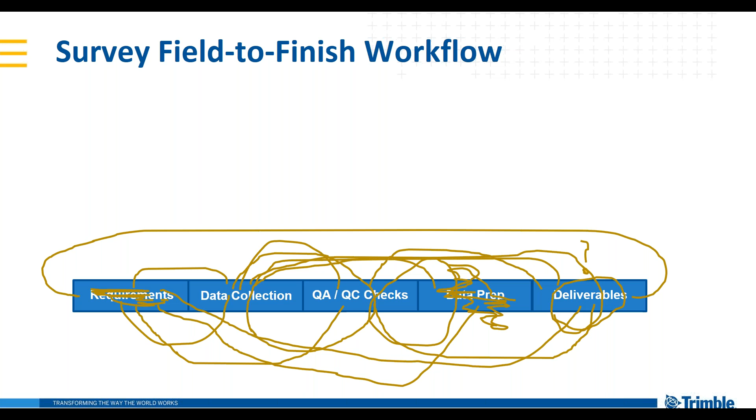So what I often found out was that the process kind of looks like this. Field work is messy, right? It doesn't always follow a nice linear path, despite your best intentions, and the ability to adapt and deliver is the key to success. And so this is the real world situation and the customer that we target TBC for. So this field to finish workflow is built and can be built on TBC with confidence.

Here's our little mission statement. I said little, it's anything but little, it's short and succinct, very clear as to where we are right now and where TBC is going in the future. So we want to be your complete survey office software enabling field to finish workflows with confidence.

And how do we do that? Well, we've done that by aggressively growing the software over the last several release cycles. If you're a longtime TBCer, then you've probably noticed over the past couple of release cycles that TBC looks entirely different.

Adam, in the 3 weeks you've been here, can you see we run lean, we run pretty strong, and we are trying to get as much value into the software as possible. Yeah, new stuff is continually going out the door, and it's a pretty quick pace.

So the story over the last 6 months, I'll say, since we had our big announcement of our new SX10 total station scanner, has been largely showcasing the SX10. And while Trimble has had tremendous success with that, and we've heard from our customers who've been very pleased with the SX10, that's a new product. And we want to focus on our core customers here as well. I'm speaking to you. You're not going to be left behind.

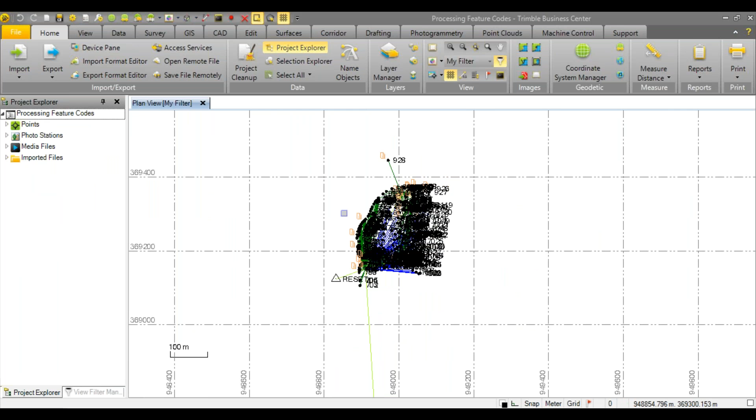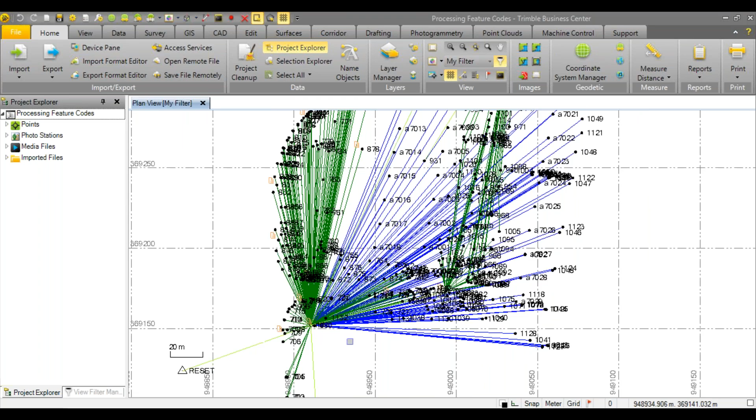So here's our project. You'll notice some points, images, image frames, and these vector lines or GNSS observations. This is raw data. A big message of TBC here is that you can see the raw data - you're not dealing with just coordinates alone off of a CSV, for example, where you have no idea where those coordinates came from, how they were collected, with what instrumentation, and then forget about trying to QC whether they were accurately collected to represent field conditions.

We'll refine this a bit in our project settings. I want to show you how to change the coordinate system. Right now we're in a default projection, so I'm going to go into change coordinate system and zone, to US State Plane all the way at the bottom here, and to Colorado North. This data was collected right outside of our offices here in Westminster, Colorado.

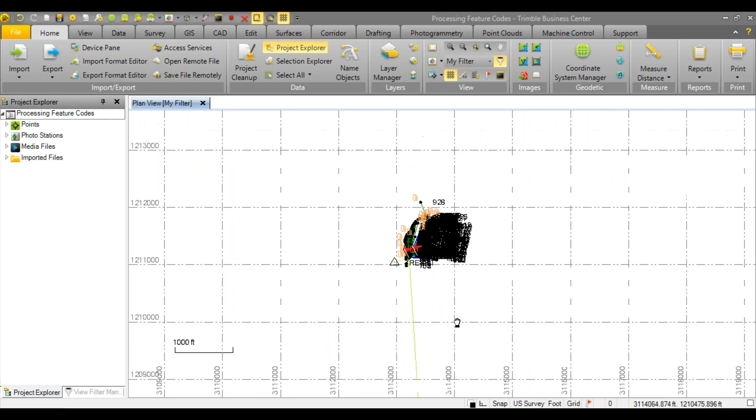In addition, you can switch and toggle back and forth between units. For example, this data set was collected in meters, but I want to see and work with these units in US survey foot, common to the United States, in the units distance of project settings. You can see in the background that the coordinates have changed automatically.

A couple more introductory things - your friends are Project Explorer and View Filter Manager. View Filter Manager, along with the layers, allows you to control what you view in TBC. The Project Explorer is sort of the story of your project. What's in here? We've got our points, photo stations, and media files. There was some imagery taken with this data with, I think, a VX spatial station. It also shows our imported files.

Along the lines of the QA/QC story, this shows exactly what was done and in what order in the field. So to step through what your field surveyor did, this RTD point was completed with a Helmert resection using these points, and collected all of this information. Very interesting, very powerful tools at your disposal - a unique feature to Trimble Business Center.

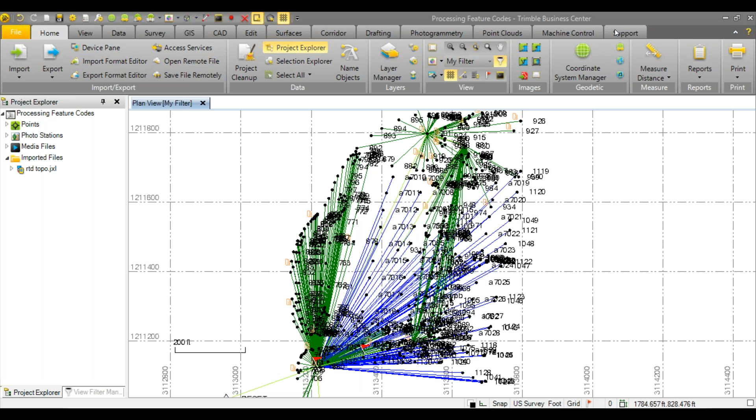Now, I mentioned the command pane earlier. Let's say I wanted to view this data in 3D, and I didn't know where that 3D view was on our ribbons. If I press the F12 key, the command pane launches. The improved command pane allows you to search for things - it's an automatic wildcard search where anything matching what you've typed, any command, will show up. So I'll type in 3D - I wanted to launch a 3D view, and all the commands that start with 3D show up here. I can launch the command right from the command pane, and I've got my 3D view.

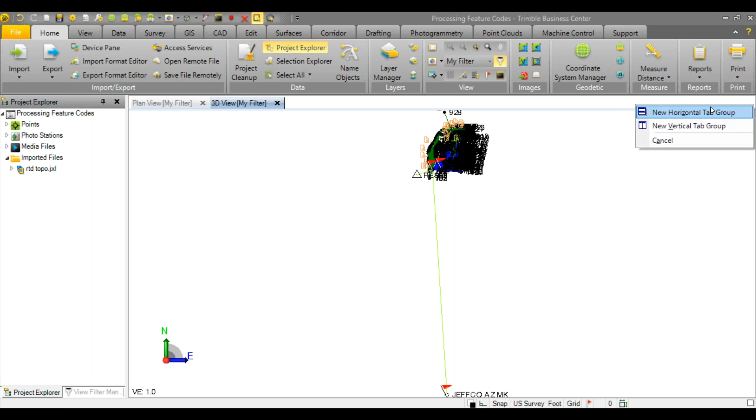Close this out, and I'll press and hold to drag the 3D view and dock it separately, so I can view this data set in plan view and in 3D view at the same time.

Now if you'll notice here as well, again on our QA/QC story, there are these red flags. What do those flags mean? There's red flags and yellow flags. Red flags are computational errors or tolerances exceeded, and yellow flags are just warnings. Now, while TBC won't tell you what to do with these, it will display that something's going on here.

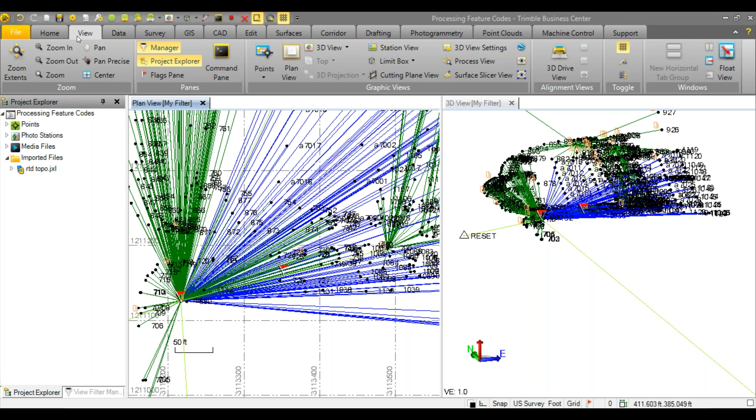Take a look. So in the View tab, if you open up the Flags pane, you'll see the source of these flags. I'm going to focus in on these two right here. If I pick the entry in the Flags pane, it is then selected in my views up top. So right here from this Jeffco AZMK to RTD to 700, there's a mean turned angle, MTA, with a residual that exceeds the horizontal tolerance set by the project.

Well, how do I deal with this? It's up to the user. We won't tell you how to deal with it. We'll just tell you we're reporting the raw data. One way for additional information is to right-click and say mean angle report. This will launch an HTML report showing the components of the mean angle, and there's our residual, 5 seconds.

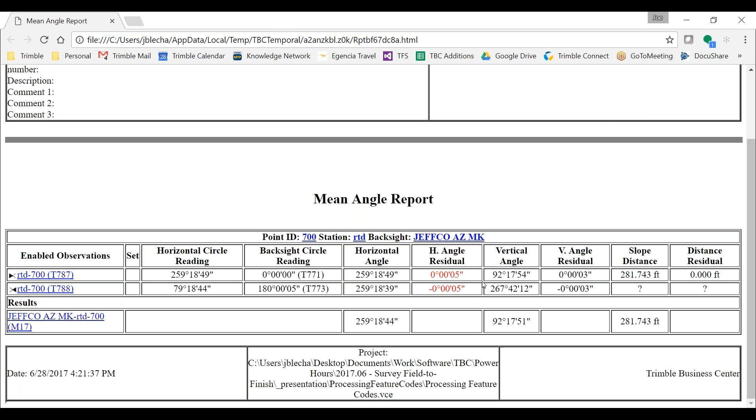Where this residual comes from is in our project settings, computation, mean angles. You can see the horizontal and vertical angle residual acceptance is 3 seconds. So that's where the tolerance comes from.

The next one I want to focus on is the Jeffco point itself. And it says this point is out of tolerance. It's pretty high. This is several inches, 22 hundredths horizontally and 62 hundredths vertically.

Again, I can right-click on this to launch a bunch of features. If I have this selected in the flags pane, it will also be selected in my points or also in my views. If I right-click, go to Point Derivation Report, I am then presented with an HTML report that is linked to my data, reporting on the coordinates, or the observations and the measurements that define this coordinate.

So this Jeffco point can only have one physical location in space, but there's 2 different observations, and this grid point here is probably keyed in the field, is used to define the grid northing, easting, elevation, and height. And here's the point that's throwing it out. Remember I said 22 hundredths and 62 hundredths vertically? And you can see it's enabled as a check. So the surveyor probably in the field went through and tried to check back into this Jeffco point from point RTD. Just use it as a check.

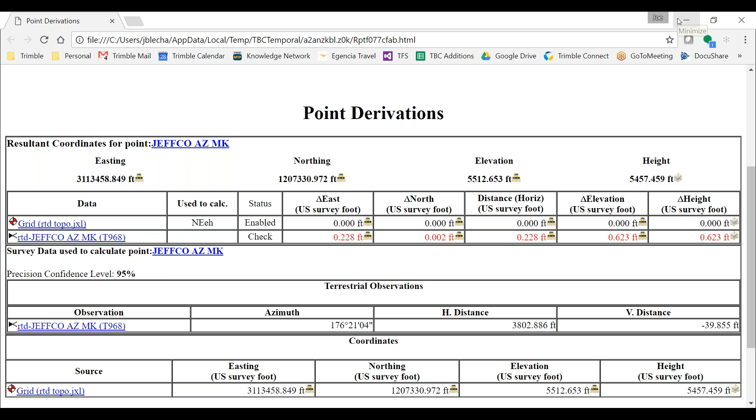And for whatever reason, maybe it's worth a phone call to your field surveyor, say, hey, what happened here? We can deal with this in TBC. Since it is only a check, I'm going to go ahead and disable that observation. And I can do that by expanding the point option in the Project Explorer, finding the observation, here it is, right-clicking, say Properties, and yep, here we go, confirmed as a check. I can turn that to disabled and recompute my project with the F4 key, and the flag goes away.

Now, Adam, that was pretty easy to make that red flag warning go away. Do you see some problem with what I just did? Yeah, I mean, your problem's still there technically. You disabled it. Like you said, you didn't get rid of the problem. You just almost ignored it at that point. It'd be good if you had another check that actually checked into it properly. Right, right. So very, very powerful tools here, and we are definitely not advocating hiding potential issues in the data, but at least you're made aware of it. And TBC, if you, as the manager or as the data processor, deems that this problem isn't a problem, you can adjust accordingly.

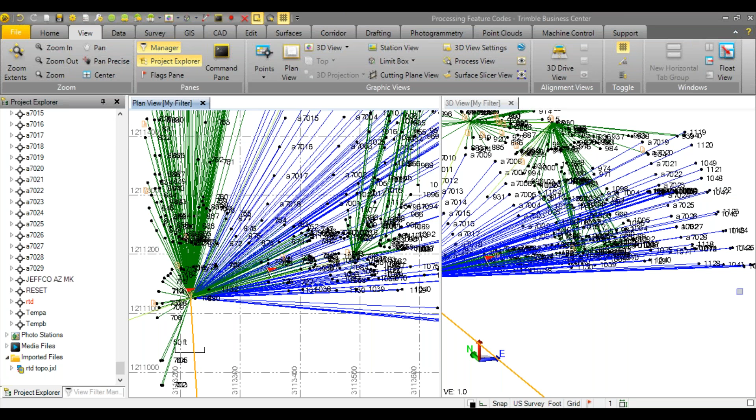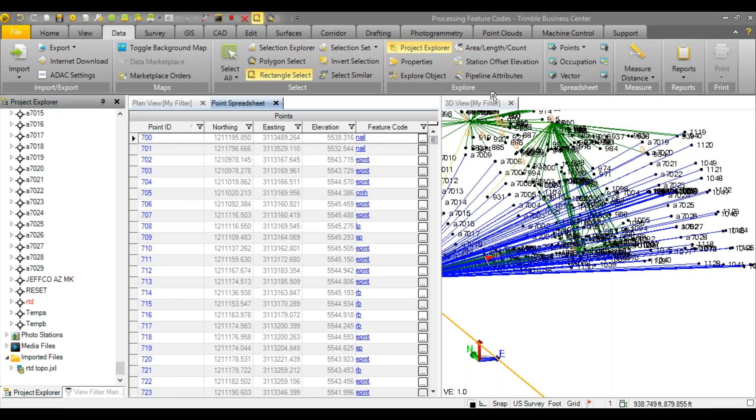Another useful tool is the spreadsheets in data. We've got a couple of different spreadsheets here: points, occupation for total station measurements, vectors for GNSS. I'm going to launch the point spreadsheet, and again, dynamically linked to our data. Any point that I pick in the spreadsheet will then be highlighted in my views. I get a feature code that I could change. So very, very powerful viewing and editing tools here.

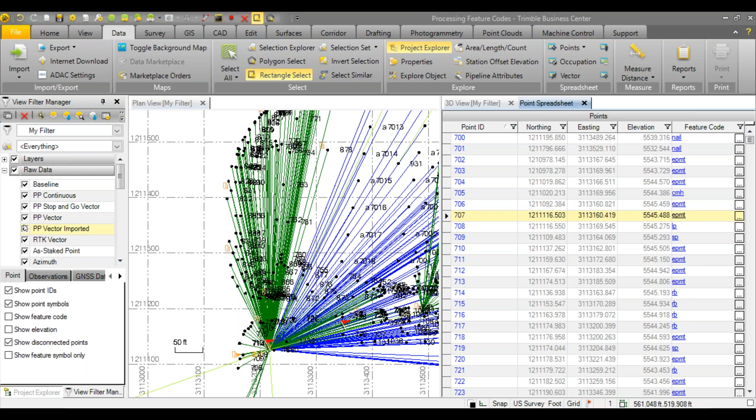TBC has a full suite of CAD applications, drafting in the CAD tab and then the Edit tab. I want to go through a couple of new ones that we've added here recently over the last couple of cycles. So in my View Filter Manager, in the raw data, for clarity's sake, I'm going to turn off RTK vectors and then total station vectors observations.

We're going to leverage feature coding in a second. I'm going to play a nice fun game of connect the dots. Sounds like fun today, right, Adam?

But I do want to show you a couple of new CAD tools in the CAD tab. These tools are licensed right now to advanced drafting: line string from points, a more automated way to play connect the dots, and then the best fit line command that will create straight or curved lines based on point selections. Then we'll get into a little bit of create COGO.

I left the point sheet up here because I want to show you how you can leverage this as a selection tool. There's a series of points here from A7010 to A7018 that I would like to create a line for. I could use the create line string tool up here, but if I've got these points selected and I click on create line string from points, my selection is retained, and I can hit apply, and very quickly I've got a line.

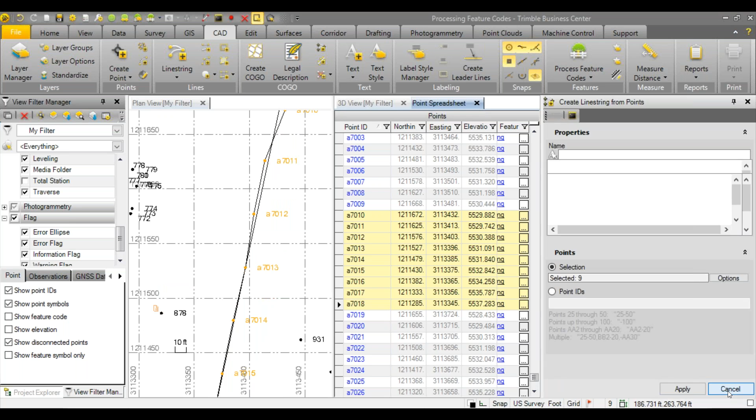In the same approach, let's do a best fit line between these points. Pick my points, pre-select, launch the best fit command, and this will automatically draw - before I even said to draw it - a straight line in 2D, 3D, also polynomial curves in 2D and 3D. Hit apply, and my line is created. So here's my best fit line.

Close this down. And then here's my connect point line.

Now, I mentioned the create COGO routine earlier, and this was originally started off as a cadastral workflow, but development realized, hey, I think we're onto something here real good. We want to expand this as a way to draft.

I'm going to launch the command, say okay, I don't want to create points - that's what I just unchecked. And there's 3 different options here with which to draft.

In drafting, you can draft freehand. With this tool, you can take a plat survey and draft bearings and distances. Or you could actually use this to trace these points out, which I'm going to show here. Those 3 options using this tool are the graphical type base, the drop-down list, and it also interacts with the plan view - drafting line work, arcs, and side shots as well.

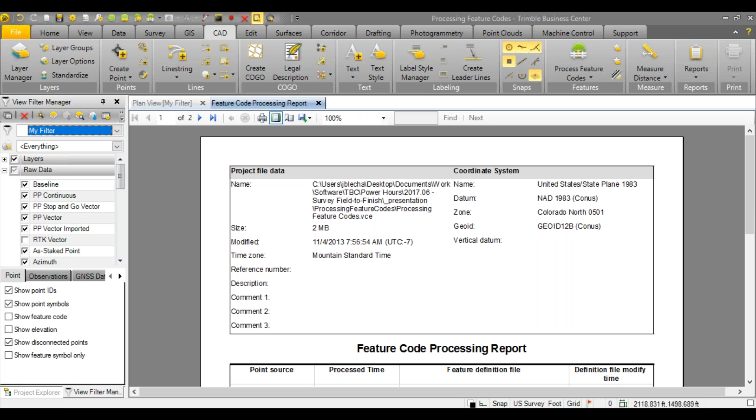And like I was saying earlier, field data collection can be messy. It can be stressful, you're doing a lot, you've got a lot on your mind out there, maybe field conditions are particularly rough that day. There's a chance that maybe you fat-fingered or messed up a feature code. So right here in the processing report, it shows the number of points using unknown feature codes, and then those unknown feature codes with those specific points.

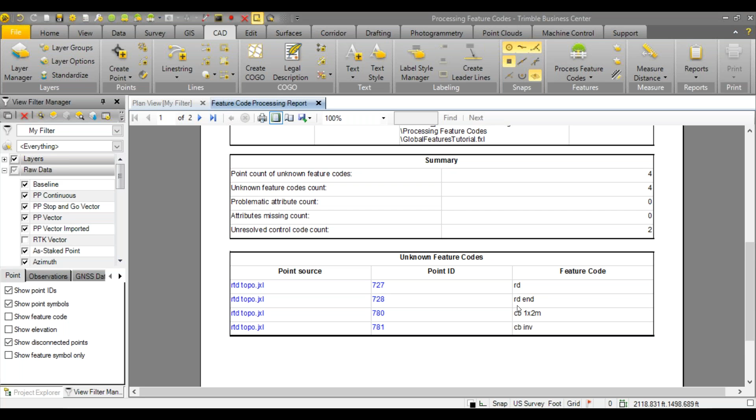RD and CB, for example. So leveraging TBC and feature coding as a QA and QC tool as well. All right, so here's my line work. I had mentioned a feature in TBC 3.70 to be able to leverage coding to include or not include things in surfaces. I want to show you that.

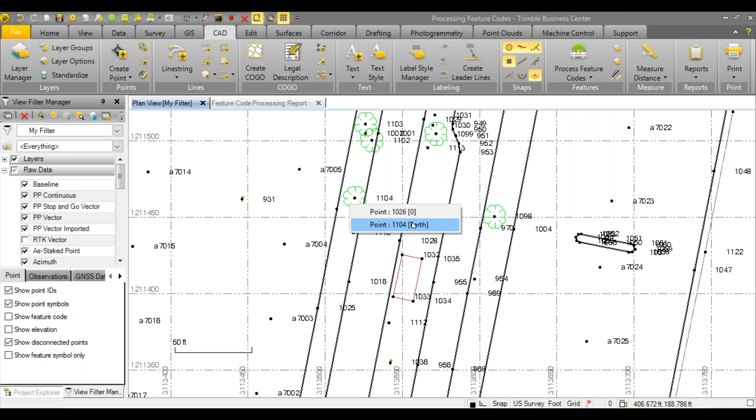I want to click on my tree here. It's a broadleaf tree. Right click and say Properties, coded BT. And here, based on the feature definition library, it's coded to include in the surface. Well, I don't really want to include these in the surface. So a couple versions ago, I'd have to go through and click through all of these trees to mass select them and change them to no.

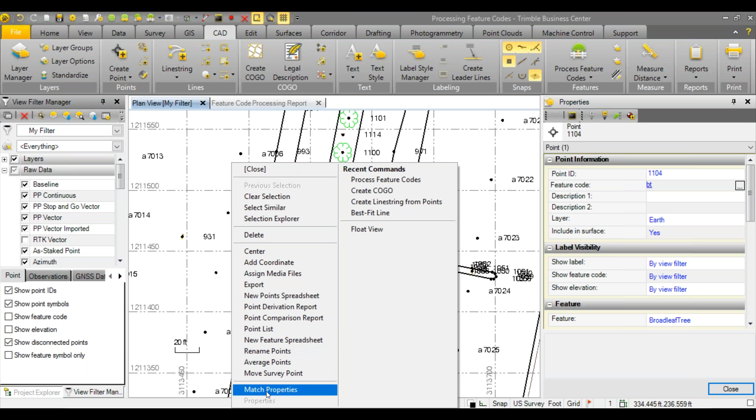We've added, I just right-clicked in Plan View Space, Match Properties and a Select Similar command, and I'll click on Select Similar to instantly select all of those trees with that same BT code. I can then turn them to no. Do not include in the surface.

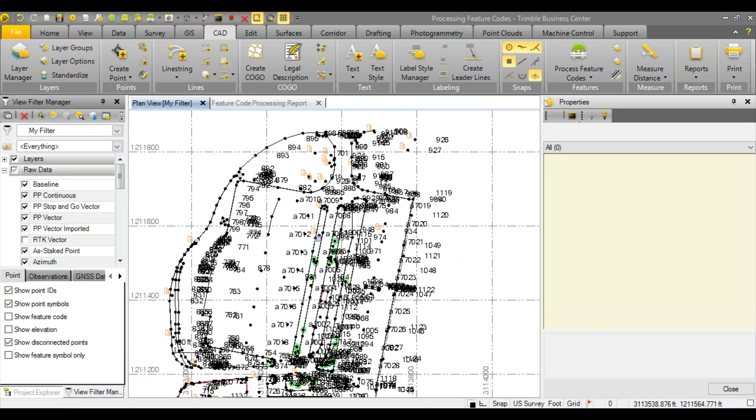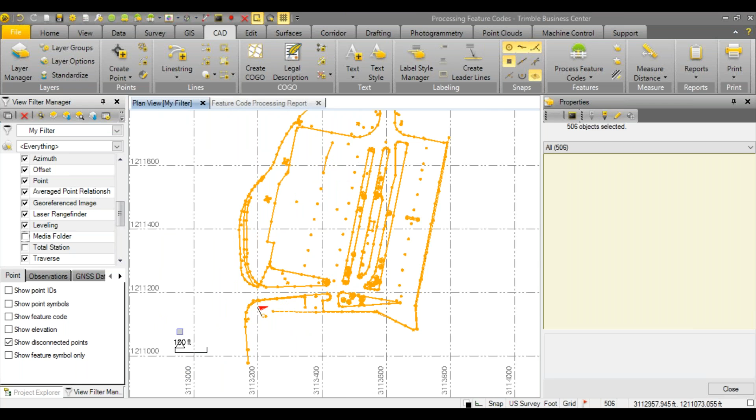So with that, I'm going to clean up the view here, turn the point IDs and point symbols off. Also turn off the media folder notification in TBC. I'm going to create a quick surface out of this. There we go. I don't want to pick up this control point down here. And I can create a surface in the Surfaces tab. Create surface.

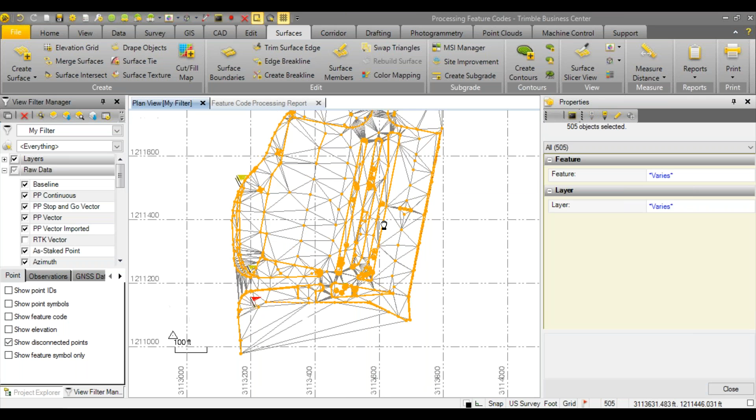I'll call it OG for original ground. You notice your objects with included surface properties, it recognizes it. Really quick triangulation and viewing the surface and the triangulation. Notice how these tree points are now not included in the surface.

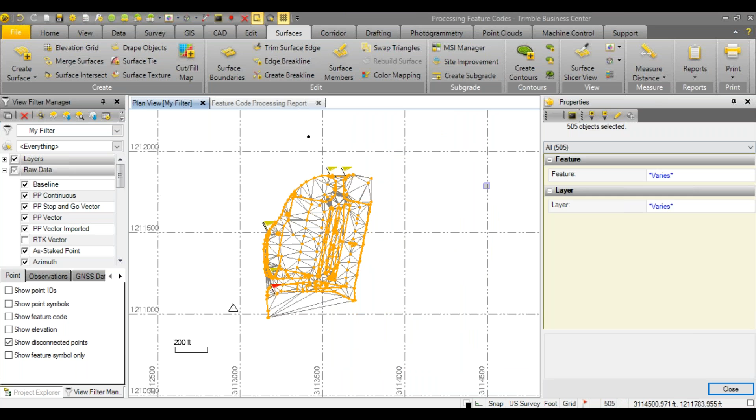A quick tip I like to run through with surfaces. Go into properties. It's got the feature still selected. As you work with irregular shaped surfaces, you can potentially run into these long, inaccurate triangles because it's a triangulated surface. It's just looking from point to point how to create as many triangles to be as dense as possible.

Well, this is the entrance to this parking lot here. We didn't collect any information here. Therefore, I don't want to include these surface triangles. You could go through in surfaces and use the trim surface edge command, or you can go into the properties of the surface, maximum edge length.

By default, it is set to 1 million meters. That's a lot of meters. Yeah, that's a top it would have. So that translates obviously into 3.28 million feet.

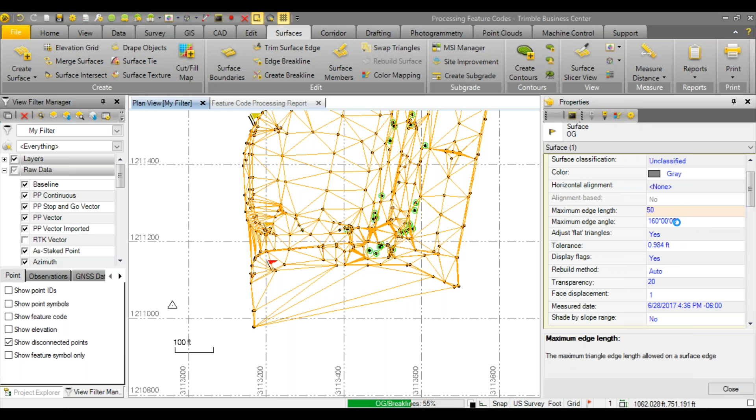Let's reduce that to, let's try 50. And those triangles will then be automatically trimmed out. Very quick, very handy tool.

For what I want to do next, I want to create some contour lines on the surface. I don't want to see really the surface at all. I'll turn the wireframe off. In the Surfaces tab, there's a Create Contours. You can specify your contour interval. I'll say it's a 1 and an index contour frequency of 5.

I equate these to the major and minor contour intervals if you're from a Civil 3D environment. You have the option of coloring the contours, giving them line weights. I'll say I want to color the contours by elevation. I'll keep them a little smoother. And then labeling them. If you don't want to label them, you can put in 0 here.

And right now, based on the surface I have and the contour interval I have, it gives you a preview of how many contours. Estimated number of contours, 81. Now, I know this data set. There is a problem here. There's not 81 feet of relief on this. So I'm going to say OK.

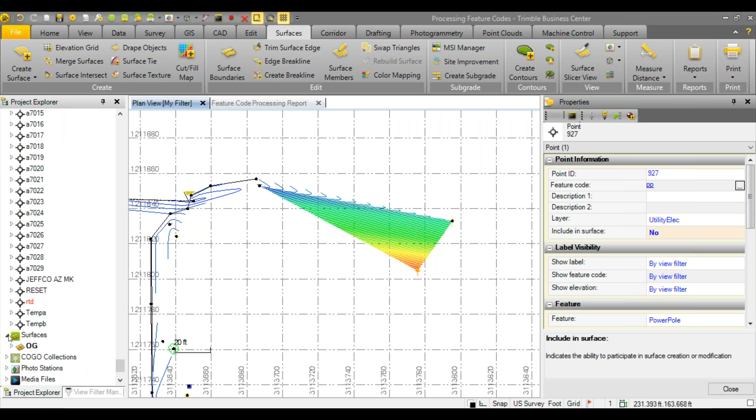Go into my Project Explorer, Surfaces tab. The contours, while they are 3D line strings, they are still tied to the logic of the surface. And I've set the rebuild method in the properties to by user. You could set that to auto, to automatically regenerate if the surface has been changed, like it should be. Or right-click on contours and say rebuild contours.

This other point is still included. I'm not going to be too worried about that. But that gets the demo across and what I really wanted to show.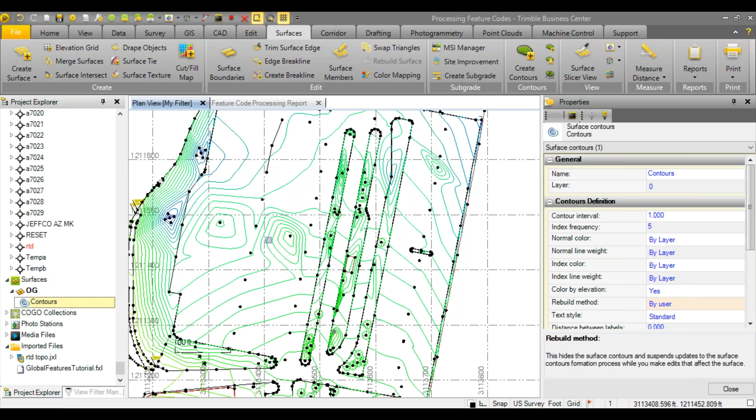Another thing that we have added in TBC recently has been further support for creating plan sets. So in the Drafting tab, licensed by Advanced Drafting, we've added text style managers, label style managers, label table style managers.

So rather than going through and manually labeling text, and say for instance you had a font that you wish to change on a couple hundred text entities, you could just change the text style that is applied to those texts. You don't have to go through and click each 100, 300, however many text objects you have to change. Same logic applies to label style managers and the label table style manager.

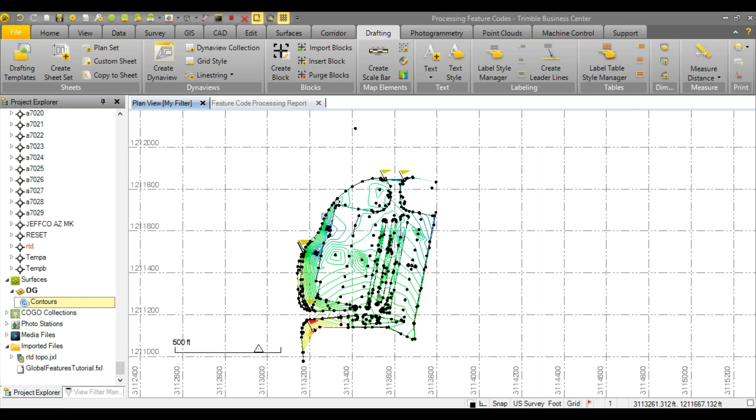What I want to do for my plan set, that's what I'm ultimately going to be creating here. See, I didn't even follow my own logic. I didn't tell you what the end was in mind. The end here, over the next 10 minutes or so, is to create a plan sheet of this surface, of this parking lot topo. And then if there's time, kick out a LandXML surface file to be imported into a third-party data software to show you our interoperability.

So what I'd like to do is label the surface area of these parking lot islands. So these three are right here. So those are closed figures. I go into my label style manager first, and I can label lines, points, and polygons. All three with their own unique styles and types that you can include in the label. I get a nice little preview of what I've got.

So right now, the standard label style that comes default with TBC has the polygon name and then the square footage. I don't care about the name exactly. I just want the square footage. If I click on it, I get the properties to remove it. If I wanted to change the units or precision. I'm going to center it. And that center moves it to the centroid of the object in question. I'll click OK. So now I've got my style ready to go. I just need to apply it.

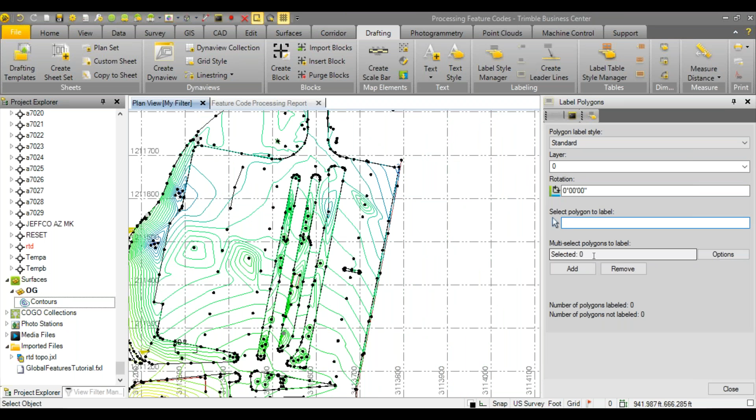In the Label Polygons command, I can select a single polygon to label, or I can multi-select, and I'm going to do that. This island has a curve associated with it, so I'm going to pick the inside. And I'm multi-selecting by holding the Shift key down as I go and pick through these polygons. I say Add. And there is my label.

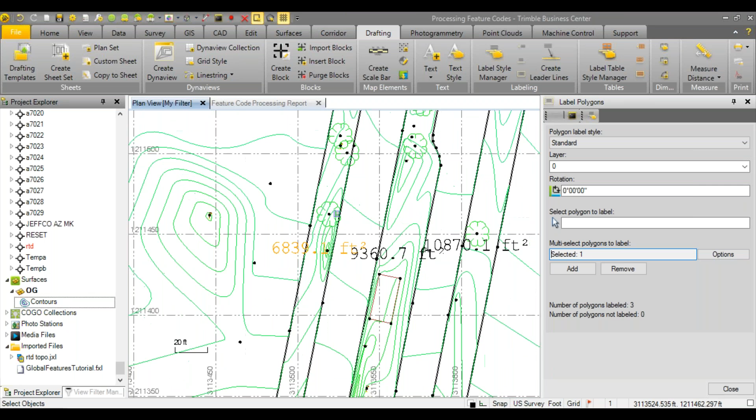Now, I've created this label using the standard text style, and I can go into that real quick. I want the back to be whiteout, so I can actually read it over my contour line. So I know I used the text style standard. I'm going to check whiteout, hit OK. Recompute the project. Oh, maybe I didn't use the standard.

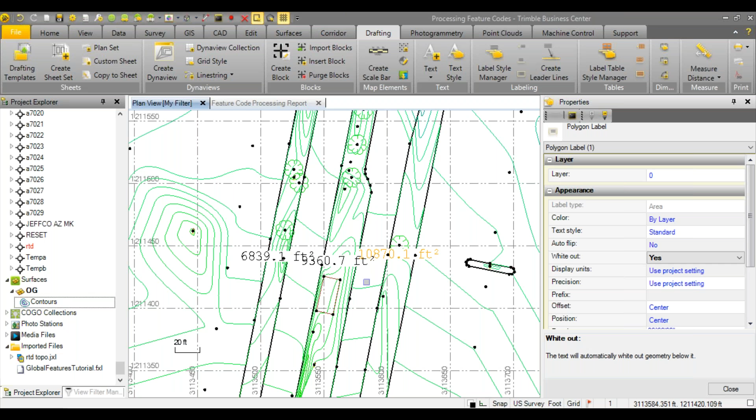Okay. So in the label style manager. Yeah, you have to do it in the label style manager for labels. So I'm in the properties of the label. Set the whiteout to yes. We've added a create leader line command as well. And that's just clicking on the label of the target and dragging where you'd like the text to be. And now we're ready to go.

And you'll notice here a new entity in the Project Explorer called Plan Sets. Project Explorer is really integral to using drafting and the advanced drafting module. There's a concept of a hierarchy here where we've imported a plan set, we've got a series of sheet sets, and then individual sheets. The sheet sets supported by TBC are cross-section sheets, plan grid sheets, and plan and profile sheets. I just want to create a plan sheet, so I right-click, say custom sheet.

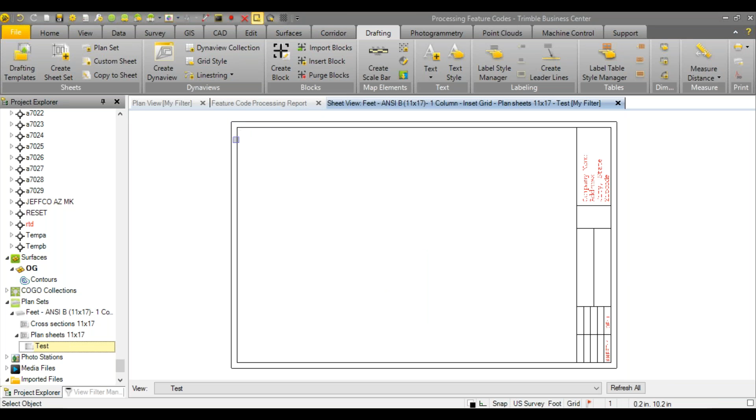I'll call it test. And now you see a new arrow appears. There is my individual sheet. So sheet set, plan set. Right-click again, say new sheet view. And here's my paper space. The link between my model space and my paper space is the concept of a DynaView. The DynaView first needs to be defined by a closed figure.

Any closed figure will do. I like using a polygon because it auto-fills. I'll show you what I mean there. In Create Polygon, I'll name it Dyna, and I'm going to pay attention to what layer I put this on. Create a new layer, call it Dyna. Say OK. And now I create my polygon geometry by just clicking.

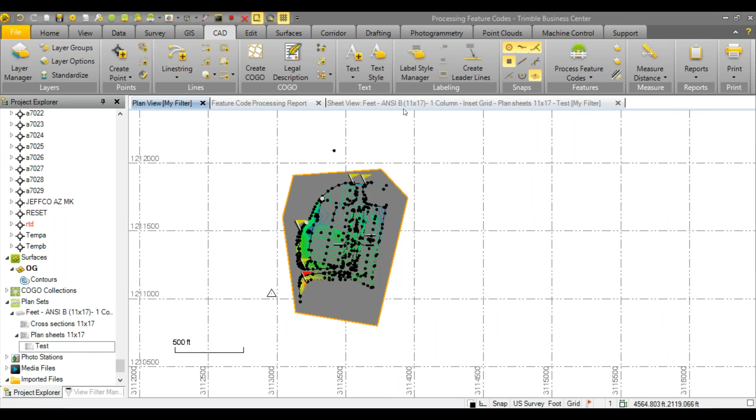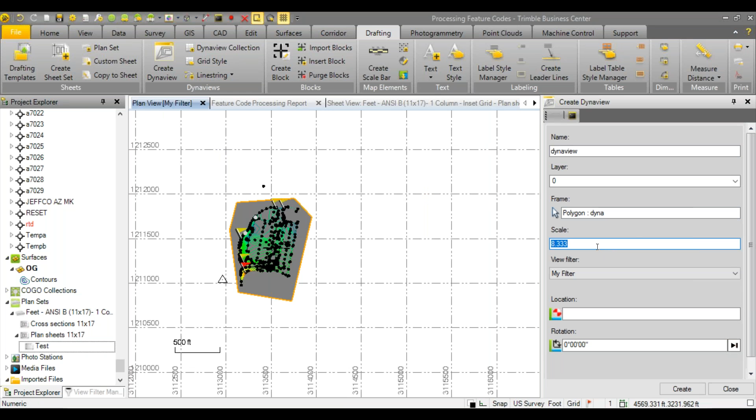Close. I'll jump back into my sheet view. Well, I just created a polygon filled around my data. I need to now create my DynaView. In Create DynaView, give it a name, DynaView. It's looking for a frame. That's my polygon. It's looking for a scale that we're not going to worry about right now, but it's looking for a location as well.

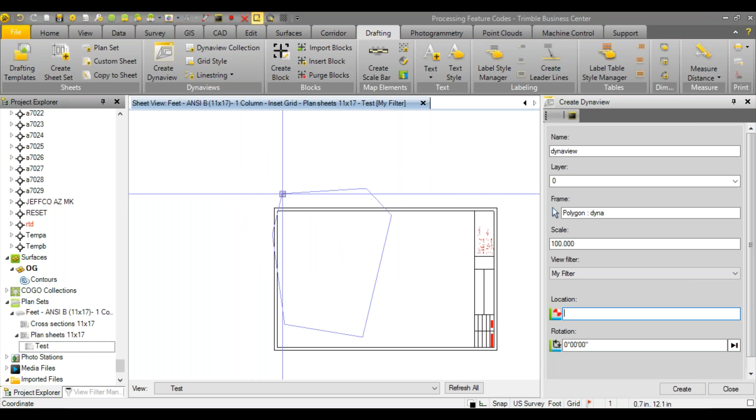And this is the location in your paper space where you want to see this data. You get a little preview there. Right now it's at 8.333, which is way too big. I'm going to bump that up to 100. Insert it. And there's my DynaView.

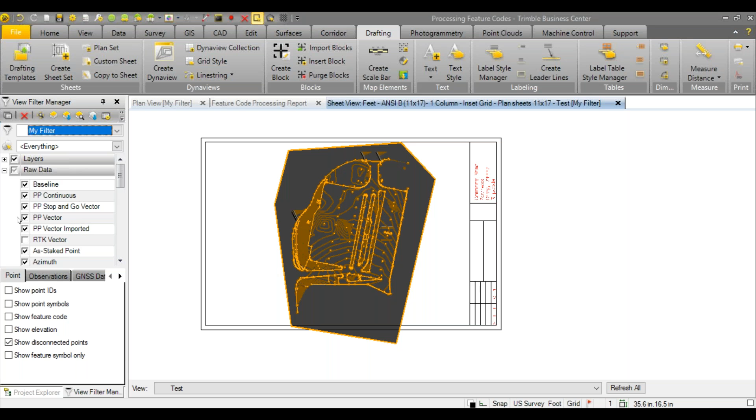Now a little trick here as well, and why I use polygon, is that this ugly gray color and the border, I don't want to see. I want this to be nice and clean and neat. I jump back to my view filter manager that I have active, just my filter. I go into my layers, turn off the Dyna layer, and instantly TBC will update.

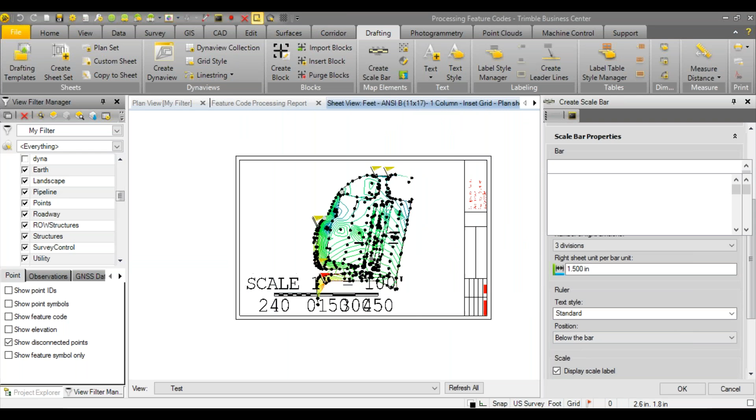I've got another minute. I will show the auto scaling of the scale bar. In drafting, I'll click Create Scale Bar. I can target a DynaView, so it reads my 100 scale from the DynaView if I pick that DynaView properly. The text is a little large. I could go in and change the text style. For issues of time right now, I'm not going to worry about that. But as your DynaView scale changes, this scale bar will also change.

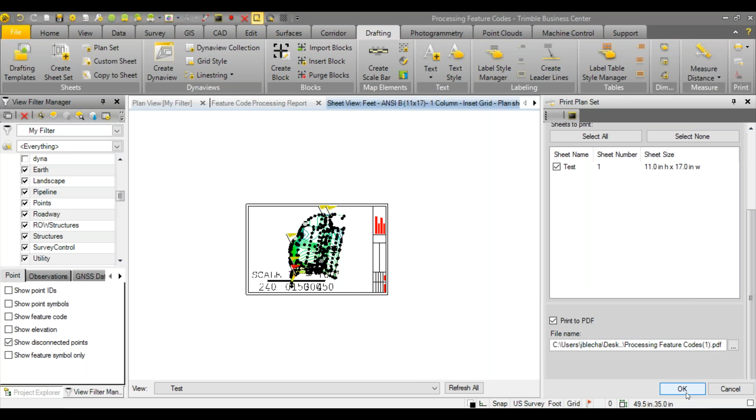Printing a plan set is quite easy. Print plan set in your drafting tab. You could print physically to a paper. We've also added a print to PDF option. I'll click OK. And your PDF viewer will launch your plan set. So I did that. I was looking at the clock. I did that in about 5 minutes.

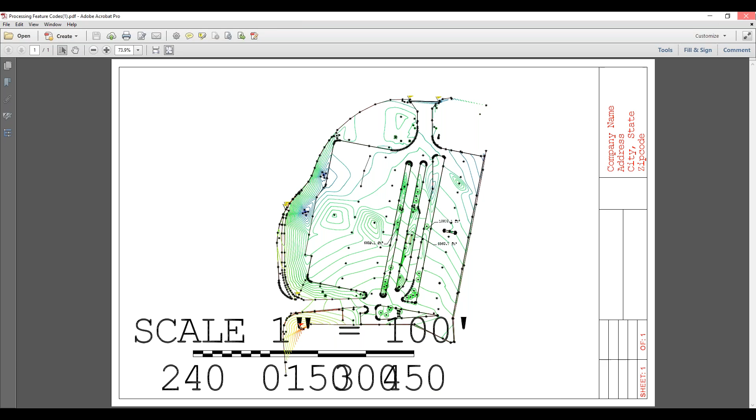This is all customizable to how you would like to see. So icons here for your company logo can be inserted, custom text blocks, title blocks from DWG, for example, can be read and inserted into TBC. We fully support blocks specifically from Autodesk. So a lot of flexibility here as well.

I'm not going to have time to get into it, but we offer a LandXML export. If you exported this surface using this and you get an XML file, bring it into Civil 3D or any program that reads the XML, the triangulation will be the same. And also what comes in are the surface members that define that surface. So you'll get all of the geometry and all of these points as well.

So I went a little long here on our demo. I'd like to answer any questions. Adam, what do we got, man?

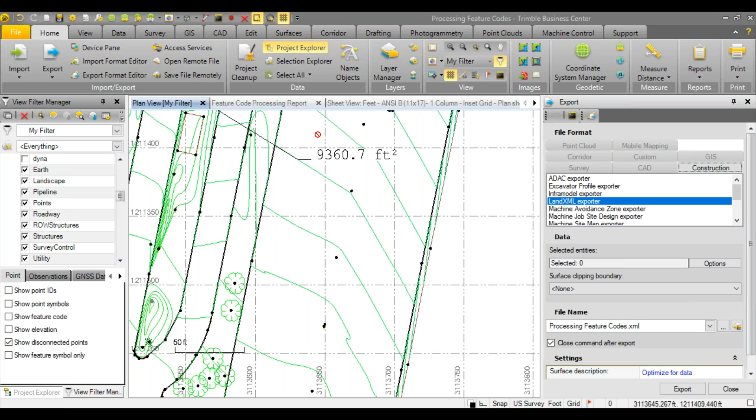Yeah, we got a few questions. One of them asking about the best fit line in 3D, if it uses a TIN to determine the best fit with the elevation, which I assume it just uses the point node elevations. Yes, maybe whoever asked that question could clarify, but the best fit line will just use those nodes selected. If that didn't answer your question, please follow up.

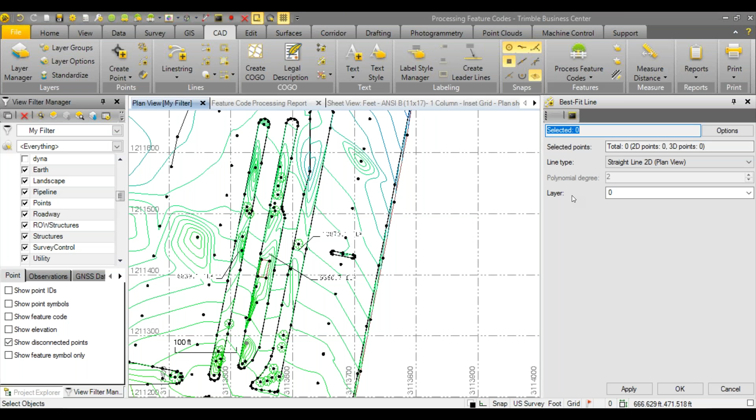We got another one. It appears CAD functions were developed with Autodesk in mind. Is this also compatible with MicroStation? I wasn't here for much of the development at TBC, but I know, like I said, one of the goals is the interoperability with all the other softwares out there. So the CAD functions are pretty similar. I don't know if you want to expand on that, Joe.

Yeah. So we want to play nice with everyone. And while the DGN format from Bentley is not supported, we do offer full support of the iModel format, the i.dgn. That was an initiative a couple of cycles back as well. So importing data from an iModel format directly into TBC with intelligence, so the roading intelligence from the Bentley product.

In addition, you can hook up to Bentley's ProjectWise to share data back and forth and pull data directly from ProjectWise into TBC. And then going back out, if applicable, to a MicroStation or a Bentley. In the export, we offer the DXF. That's probably your best bet, in addition to the LandXML.

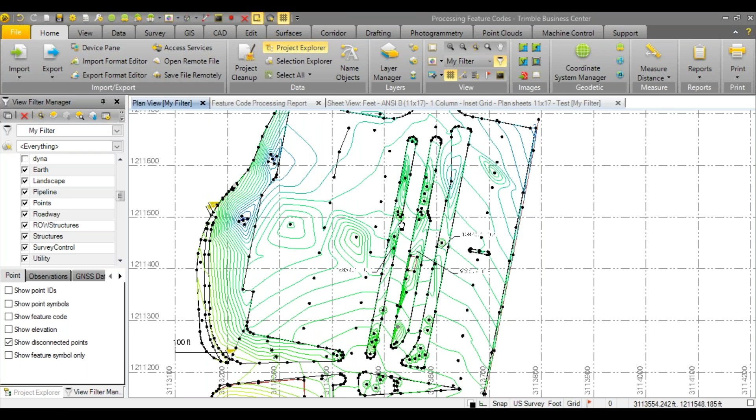I have a question here from Travis. What happens to a point if you disable it? As far as I know, the point still exists there, but it's not going to be used in any computations. Correct. So let's take, for example, this kind of rogue point here. If you can see, I've got a little slice of my surface and contour still there. Point 926. Check out the properties. Scroll up to find it.

It is defined by a single total station measurement. I'm going to go ahead and disable it. See, my little red button here is on to notify me that I need to compute the project. I'll recompute the project. The point goes away. I turn the surfaces off, but it also would then not be included in the surface definition.

I'm going to rebuild the contours, and you'll see there that that point is not included in the contours either. And to turn that back on, data is still there, 926. I would just re-enable that point.

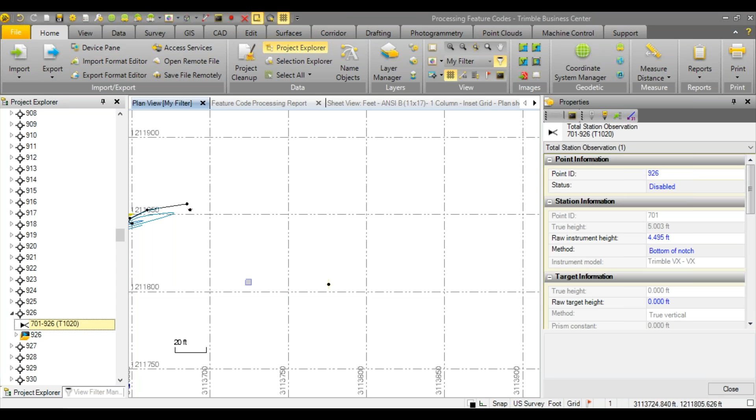Speaking of contours, how about editing a single contour line? Maybe. Yeah, so these contour lines are just featured as CAD polylines at a single elevation. You could right-click and hit Edit, also in the Edit tab. And as you can see, as expected, there's a lot of vertices. They're all the same elevation. But if I pick an area I want to edit, I can click and manually edit that contour line as well.

We have a couple of questions here about FXL and the feature coding. Let's see. How do you control and change the size of point symbols inserted by the FXL? That would be in the feature definition manager. Who asked that question? It's George Turner. George, we'll get back to you on that.

Unfortunately, I think that answer for how to change the point symbol size is a little bit more involved than what we have time here. You'd have to do that within the feature definition manager. And so myself or somebody from the TBC team will reach out to you with that answer.